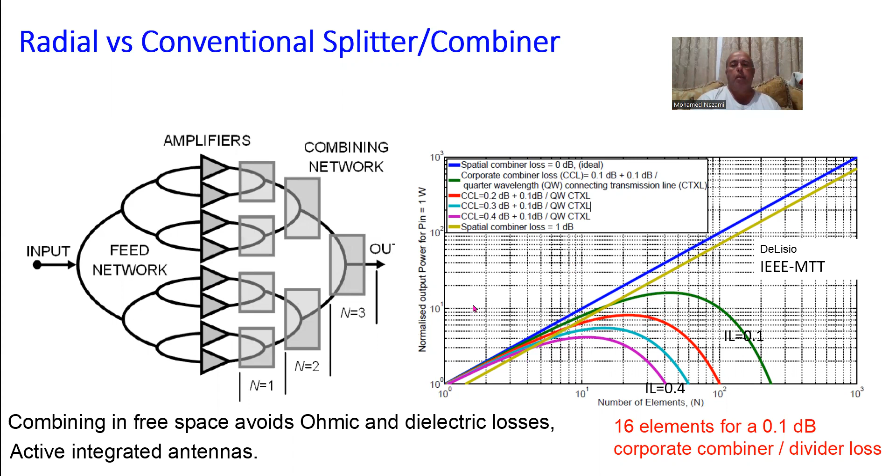So today we're going to cover one last example of radial combiners. It's similar to the last video, same exact one, except for a different frequency this time.

We've got a coaxial line feed at this point, SMA or N-type. We come in, and then we have a tapered coaxial line which has a diameter oversized to fit the probes. The probes this time, unlike last video - last video they were coaxial metal probes where you extended the inner conductor out and loaded it with a little disc, which was basically your waveguide-to-coaxial-line transition.

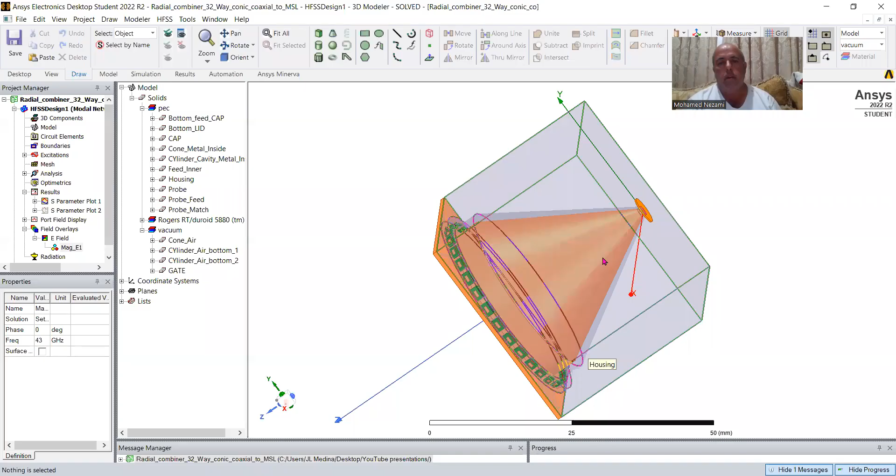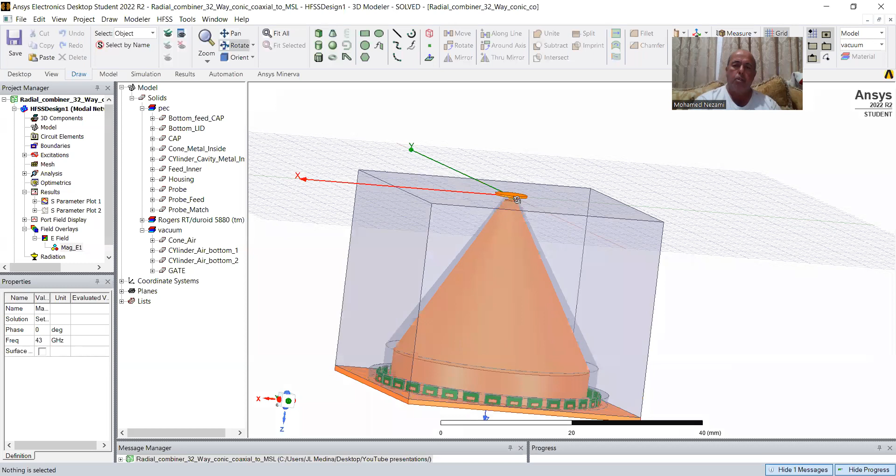So just so we can show that better, let's go to HFSS, and this is the system. Basically we come in here, we feed the signal on this disk here. This disk is basically a top cap, a metal cap, and there's this brick of aluminum in here with a hollow cone where the inner conductor comes in. We start with a small piece extending the N-type inner conductor, and then we taper out and match the parallel impedance of this line here.

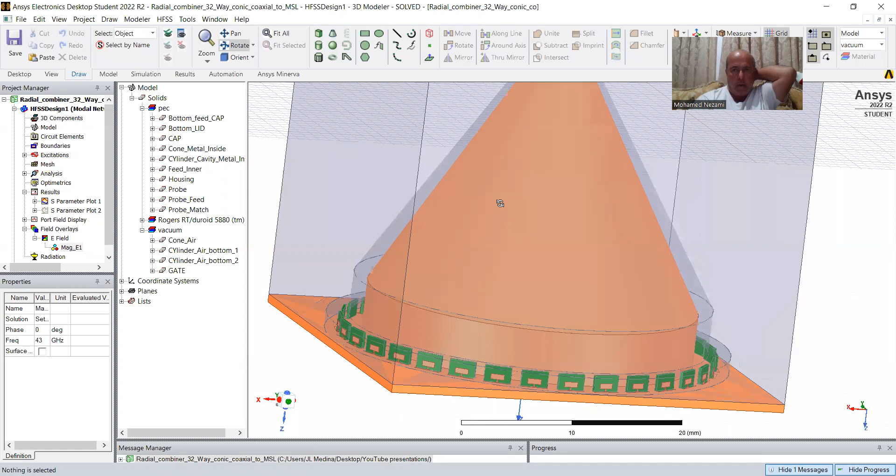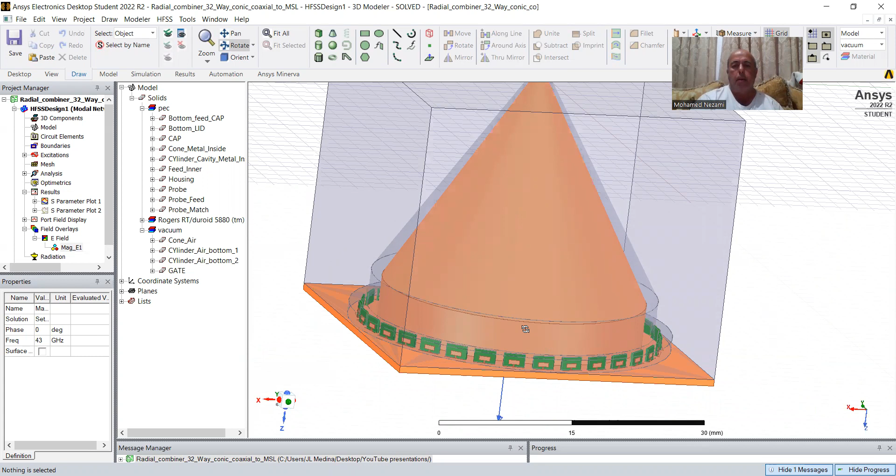This is a line here where the tapering goes all the way from 50 ohms to this point, and this is a coaxial line here, except it's not tapered, it's fixed. I believe this one is probably 30 ohms, which means the probes are 30 times 32.

And then the probes are basically, this is the probe. It's just a little microstrip antenna connected to a feed line, and that comes off the bottom. I'll show you in a minute.

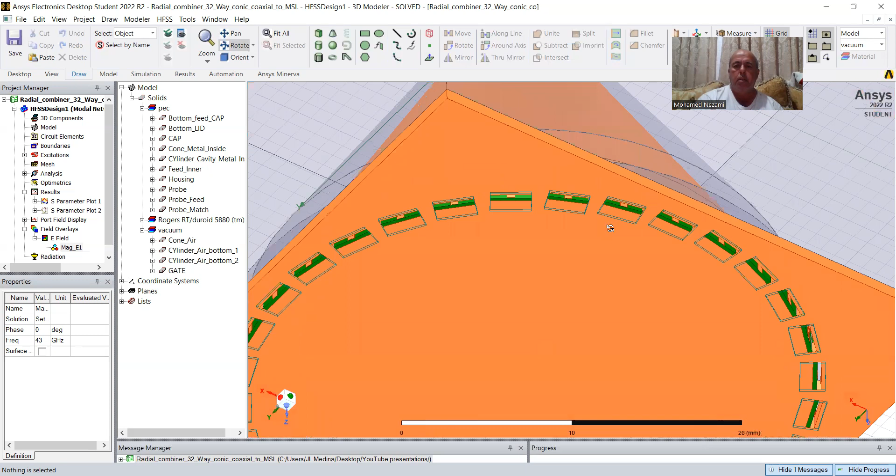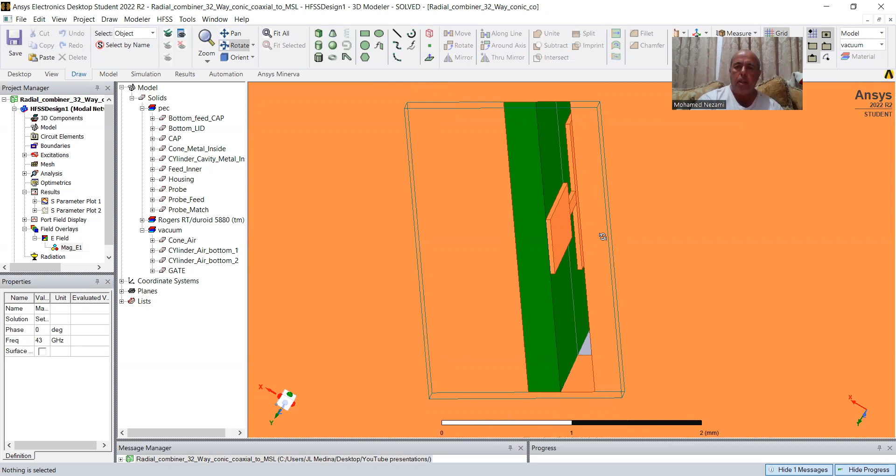You can see it right there. So you can see how this is it. So there's an opening here where the substrate goes in, and then basically a small piece of 50 ohm line, that's the 50 ohm line, and then a narrow line, and then the strip, the rectangular patch in there that picks up the signal.

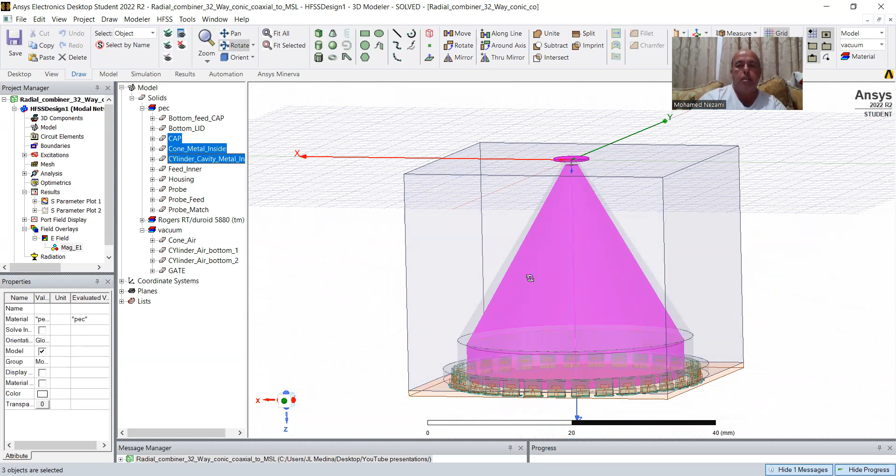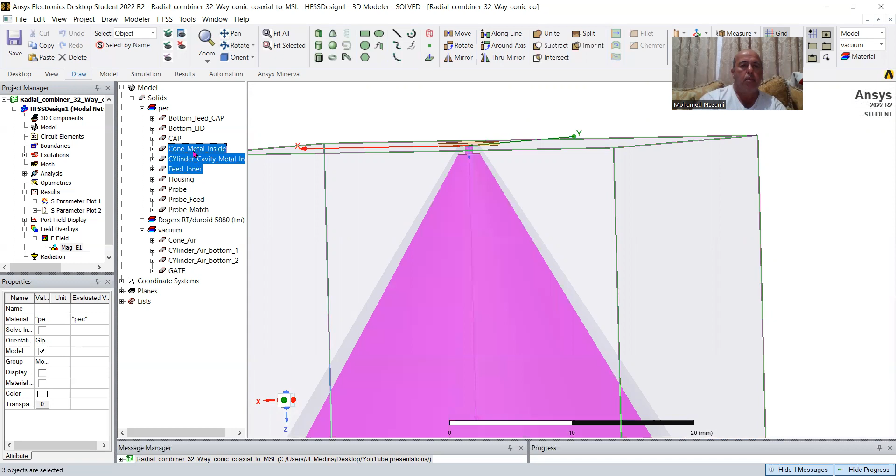So now again, let's look at this again. This is the cone that represents... okay, let's see, we need to grab the probe. Okay, here it is. So we need to have these guys. So Feed Inner, this one, and then this one.

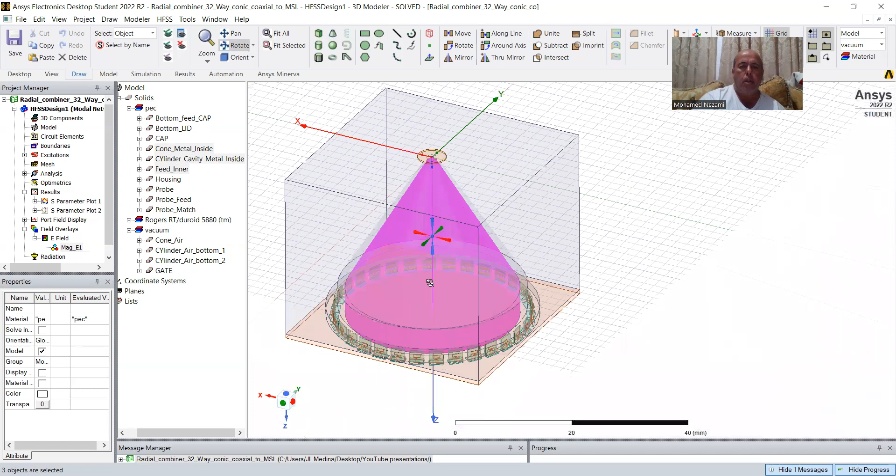Okay, so now if we zoom in on that, that's basically our, as you can see, that's the inner connector, inner conductor of the coaxial line, starting from 50 ohm, tapering to this impedance here that goes out linearly, and that's a transformer basically to match the impedance of this line in here that is basically matching to the 32 times the parallel combination of 32 probes around the system.

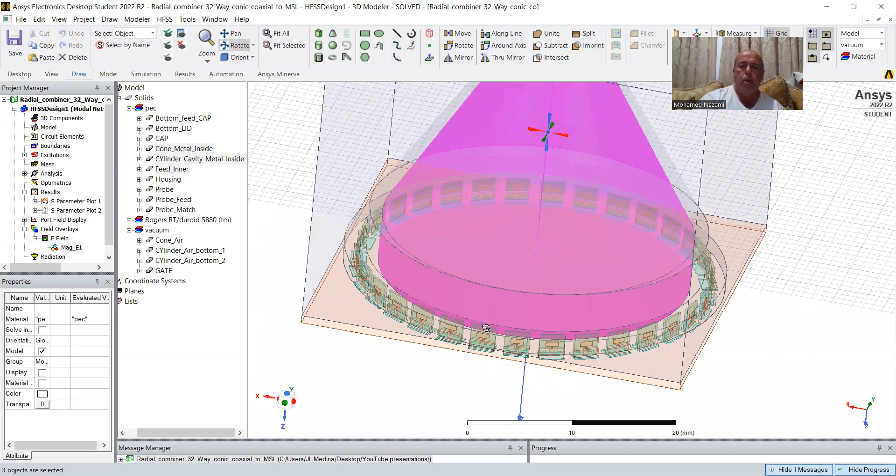Okay, so let's get back to the session. Now of course the coaxial connector, when we feed the cap in here with a wave port, basically the E field distributed symmetrically and equally 360 degrees apart, around. And that's really what offers the key to the symmetry and the good matching between all the peripheral ports. Okay, of course, alongside in the axial, in the outer,

alongside the inner conductor, this is what you're going to get. You're going to get an E field that distributes like this, of course, and it will be symmetrical every half wavelength. So let's go back to this one.

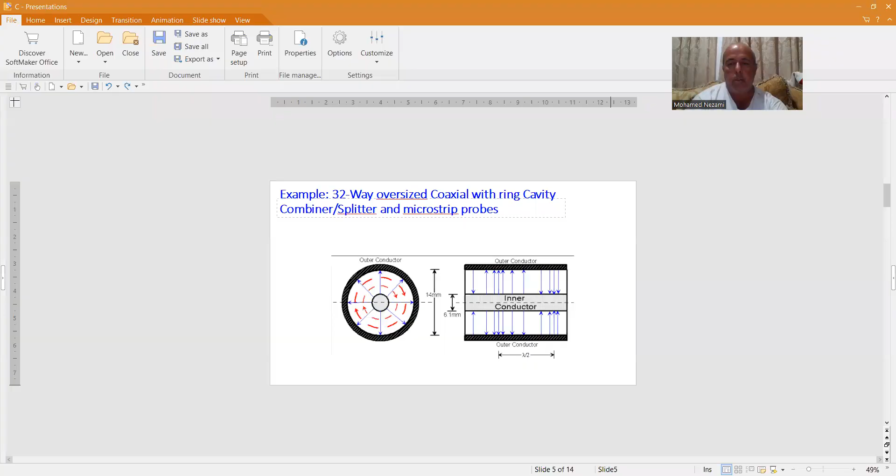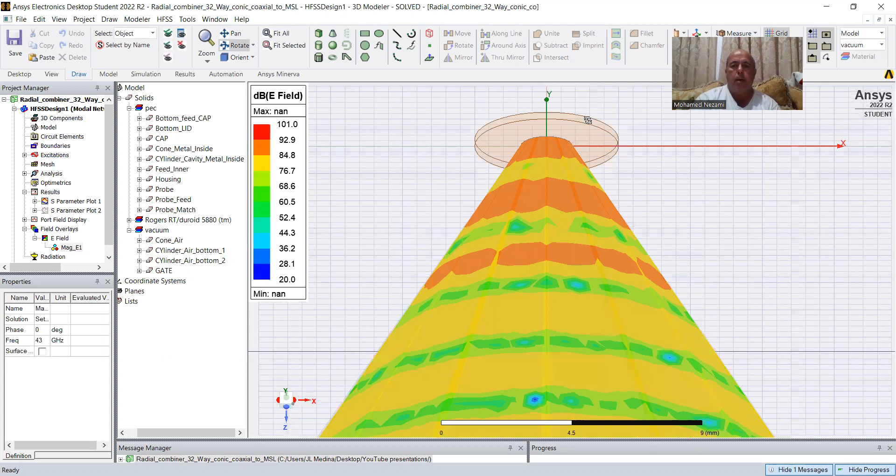So if we look at... let's flip it. Okay, if we look at the E field on this, and I'll show you in a minute when we run this, you can see that the wave, I've excited the wave in here, and the wave propagates, and you can see the color coded, according to the strength of the signal. As you go down and down, the signal gets less and less because it gets divided into 32 symmetrical parts.

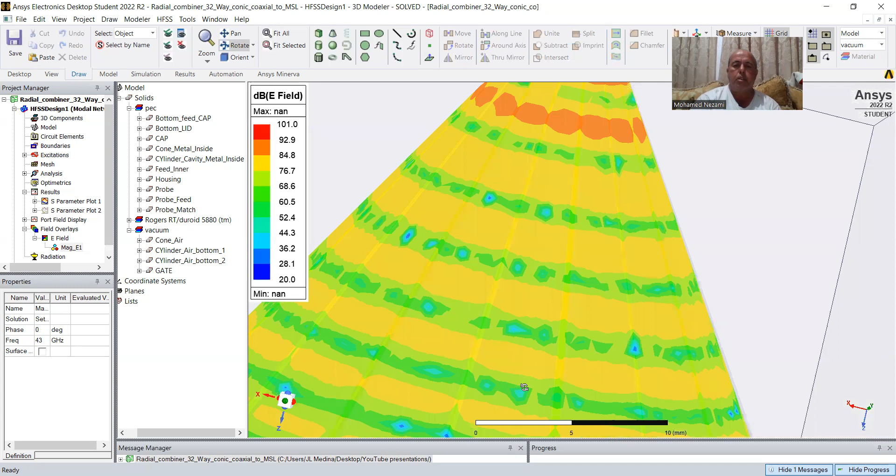So you can see that where the half wavelength symmetry is coming in alongside the cone that comes in, and then you can see it also at the bottom. If you look at the bottom, you look at how symmetrical this is, or close to it. So the signal, well this is from the top really, but this is going down the cone.

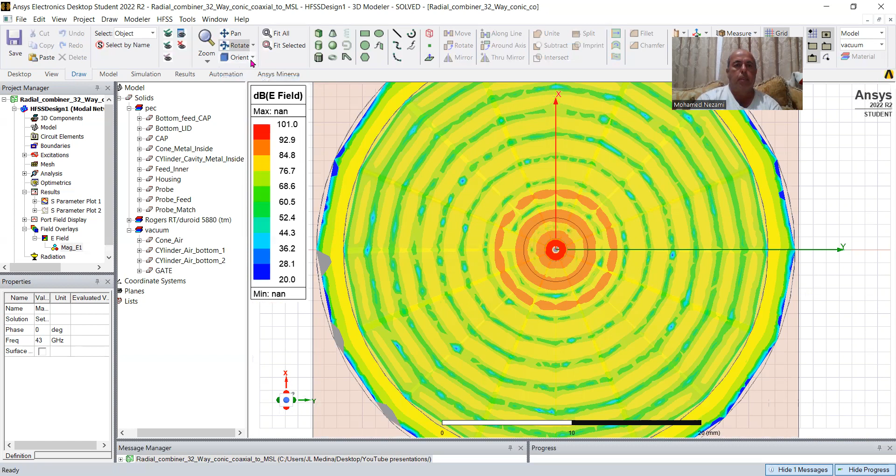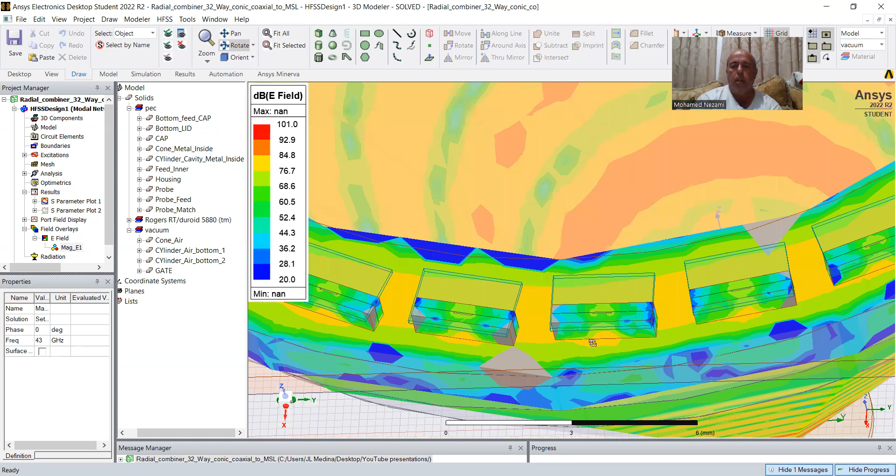Let's look at... okay, this is the bottom. So if you can see the bottom, look at how symmetrical this is. We come down, the signal comes down all the way, and it goes into the probes equally, splitting on all of these. So you can see how well this is balanced. Okay, all right.

So somebody might come in and say, well, how do you design the cone? We know that first of all, you want to have the bottom in here, which is the cone, and this is plotted as a microstrip, but regardless, this is just showing the impedance profile, because the width in here, as you can see, is for 50 ohm and the width here is 25 ohm, so this is wider than this, and in between you can go either linear

or you can do Klopfenstein Taper transformer, or you can do Dolph Chebyshev Taper. These you can reach out to me if you want to know more about, but just type these few keywords on Google, and you'll get a lot of theory of operation and methods of designing these and build up background.

And especially from this website here, they have these nice fellows here. They posted a lot of calculators. One of the calculators is actually to do the Klopfenstein Taper transformer, in which, of course, back then these guys did it a few years before ADS and AWR included a built-in synthesizer for the Taper line. So you don't have to use a spreadsheet calculator that you get from this site.

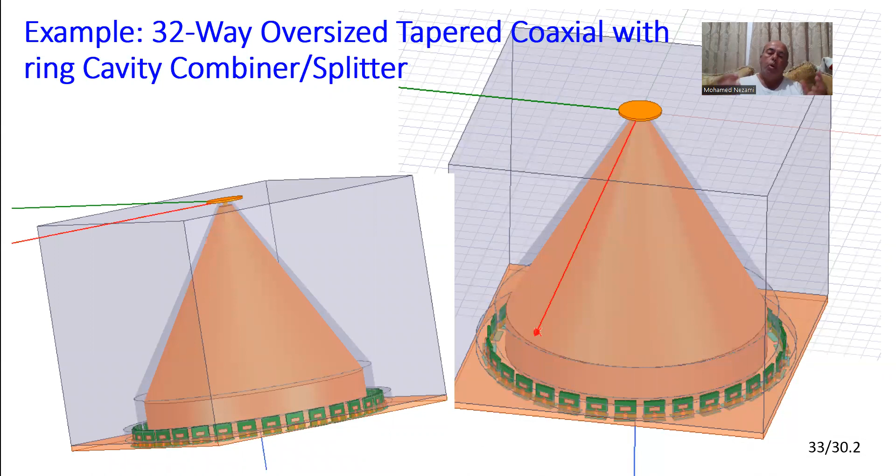That automatically gives you the profile for the inner, and therefore you get a mapping, a profile plot that shows the distance versus the impedance as it gradually matches the 50 ohm to this side here, where you're basically loaded with the parallel combination of all the probes.

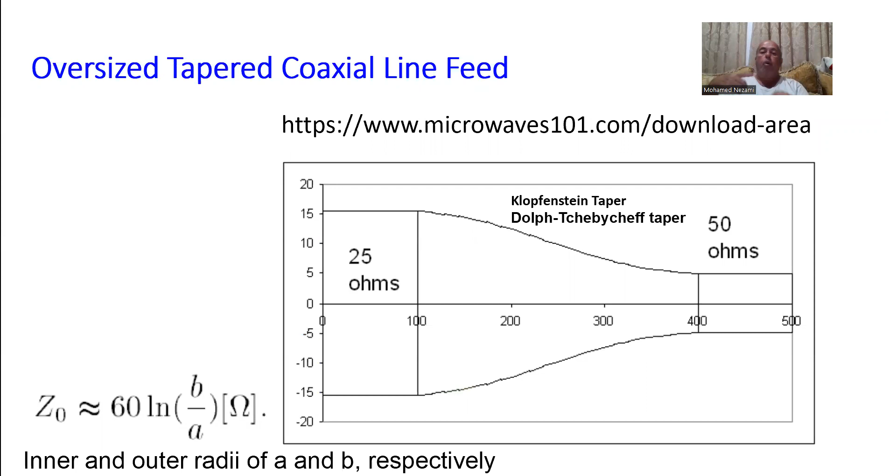So here are the probes. I just showed them—I hide the rest of the system, and we can show only the probes in here.

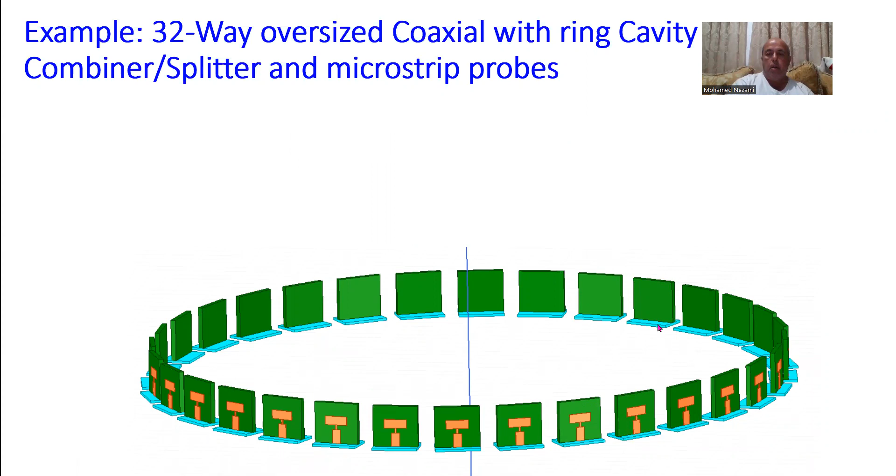There is a publication. So this system here was done for the Q-band—good anywhere between 36 to 45, or 35 to 45 gigahertz.

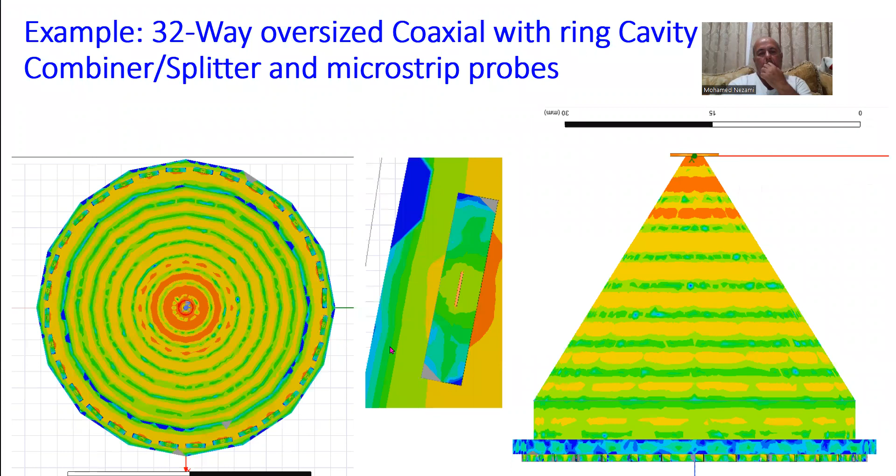So let's get back to—okay, so we showed this, we showed how the power is picked up.

There is a publication that is based on very much the same thing, except I modified it, and I found an error in this one here. There is an error.

When I looked at this, I realized they left out the ground in here. There's a ground that should be on the substrate. There's a ground piece right here that goes in underneath the probe, because the probe in here has no ground plane. But as soon as it gets to here, that's where the 50 ohm starts.

This is the ground on the back that is underneath this area here. This area needs a ground. This is not a suspended line—this is a microstrip line, so it needs ground below it.

Unfortunately, in this one, they extended the probe feed line all the way to here, and this is without ground—it's floating right now. This is a mistake. It's a little bit older, about 10 years or so publication, but they may have drawn it and left it out because that's not correct.

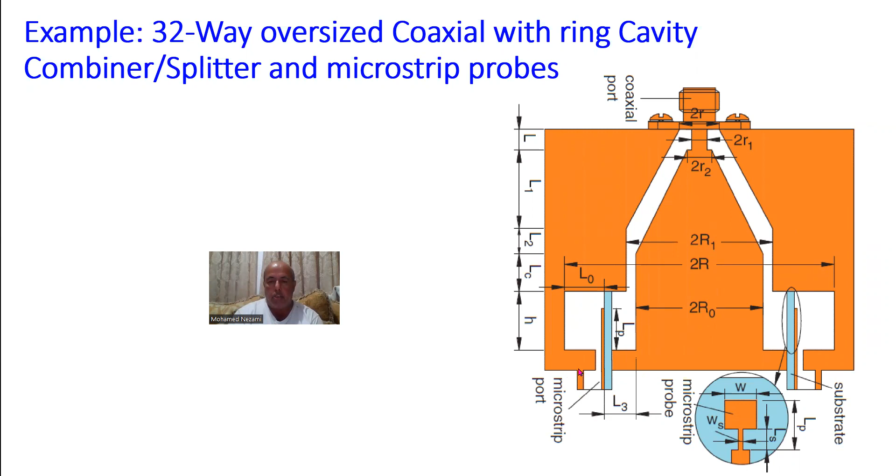So you can put all of this in HFSS, and that's really what I did, except I basically terminated this to this point. I did not extend—I got rid of this, and just stopped right here, because that's justified since you're interested in just the splitter without any additional extension.

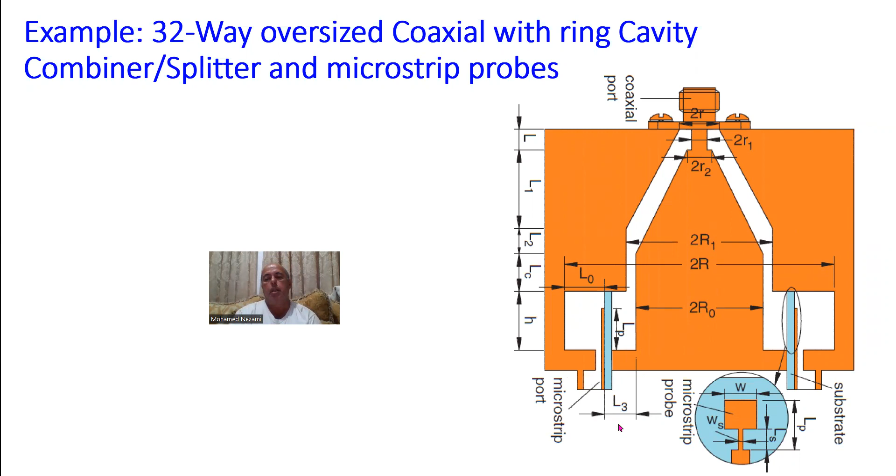So where would you use this? This is exactly where you would use it, like we've been showing—you use one of the splitters on the split side on the input.

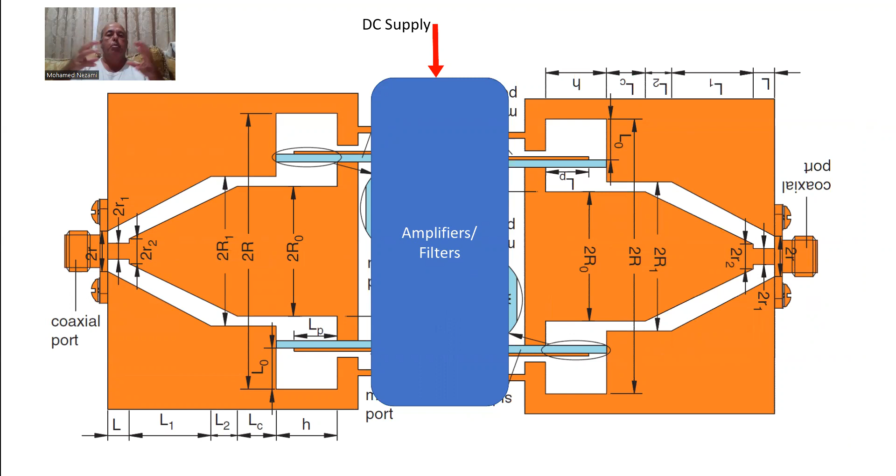The probes come in, and these will be individual 32 individual RF amplifier cards that you plug in all around the system. You have to assemble it and assemble the heat sink as well, and so forth. This becomes like a little tube, and this would be a radial array power amplifier made of 32 elements.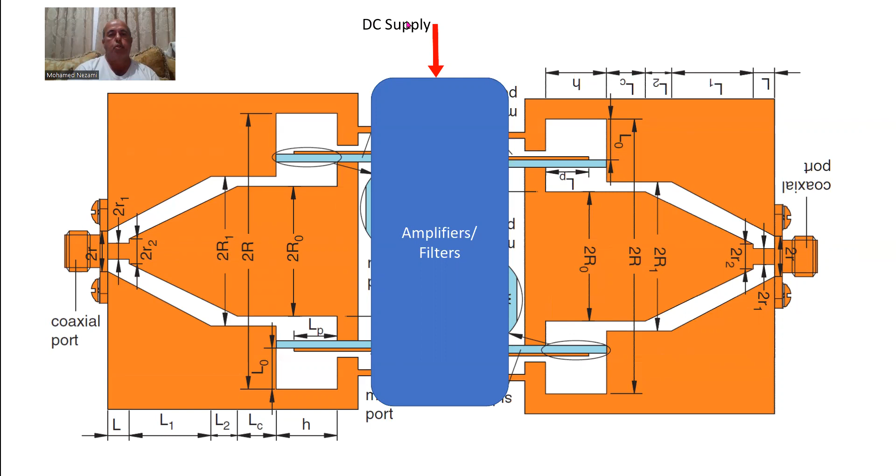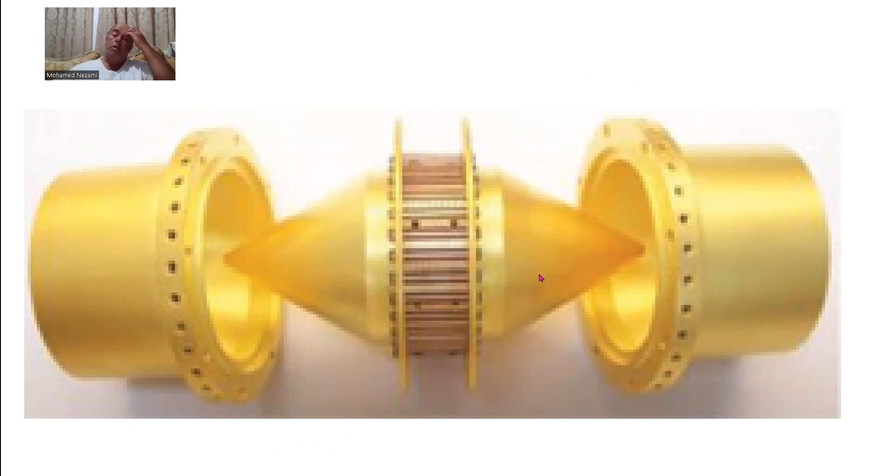Your DC comes in here or on this side. Now this is a picture from that publication, which I will show you where it is in a minute, that shows how they tested it back to back. This is usually what you do: when you design one of these, you build two of them and put them back to back. It's easier that way instead of trying to test this side using a network analyzer, where you'd have to attach edge mountable SMA connectors, adding more stuff, and you can't get a close look at the actual losses and impairments of the part itself. So the best way, since it's symmetrical and repeatable, is to build two and put them back to back, giving you only a two-port device, input and output.

That's it. Unless, of course, if you're not convinced with the 3D modeling results you can get, you can go individually to all these ports and start building a fixture assembly to look closer and analyze the signal coming from every port individually.

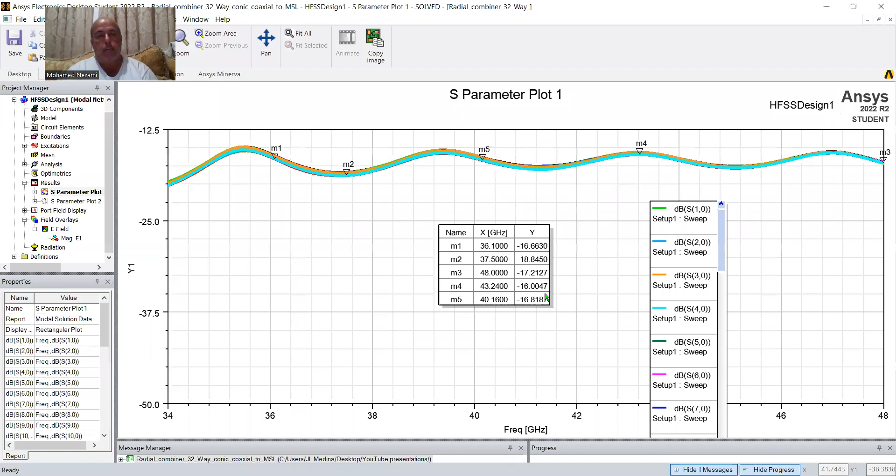So this is after it's assembled. So with this we have really covered all of the aspects of radial splitters and combiners, which I wanted to show you. We've used all these designs to show how this system is constructed. This board, by the way, was done on Duroid 5880, just in case.

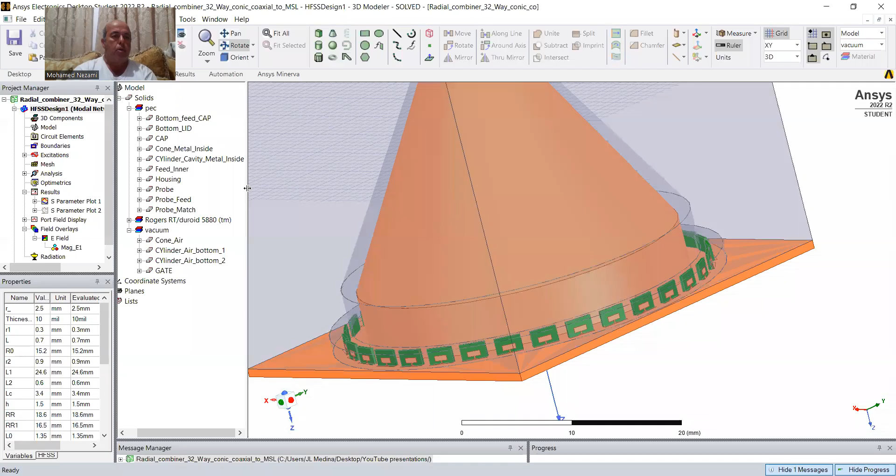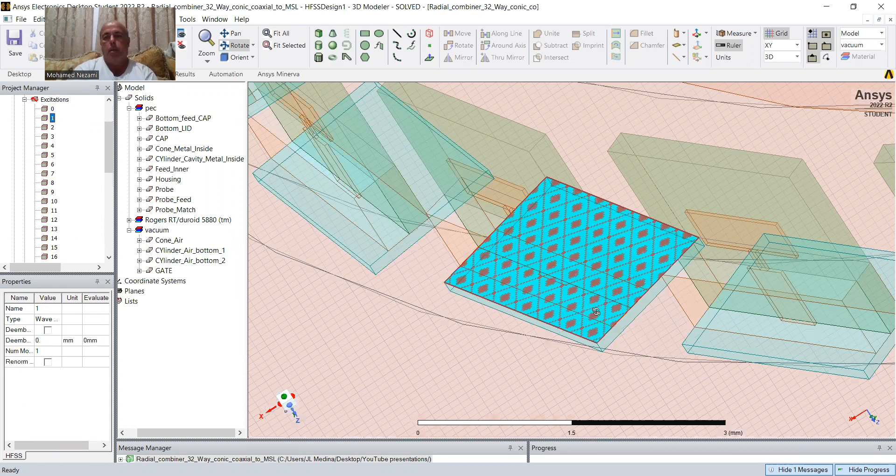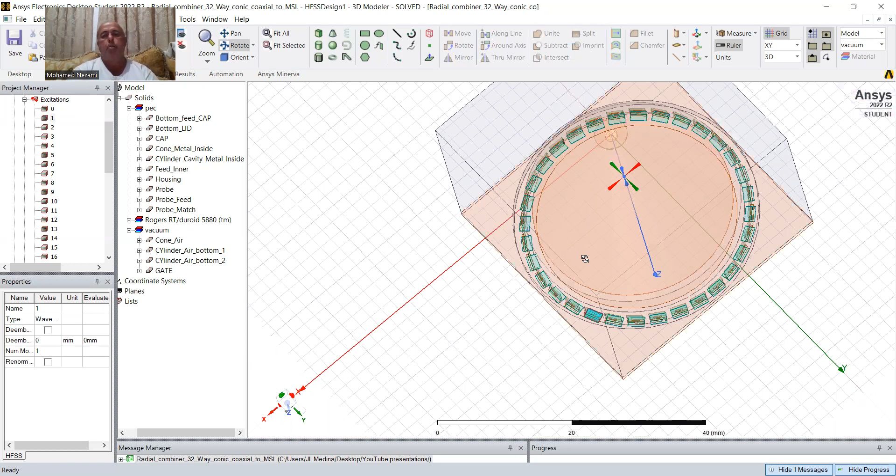The port excitation of this, just in case some of you are interested, this is basically what we do. This is one excitation here, which is a wave port, done on this enclosure on this end. Then the peripheral ones, here they are. So I created a sheet, and that sheet basically has a wave port to it as well, on the peripherals. Every one of those peripherals has a sheet that basically acts as a cap to the bottom opening in the disc cavity. So as you can see, everyone has a cover sheet which I associated with a wave port.